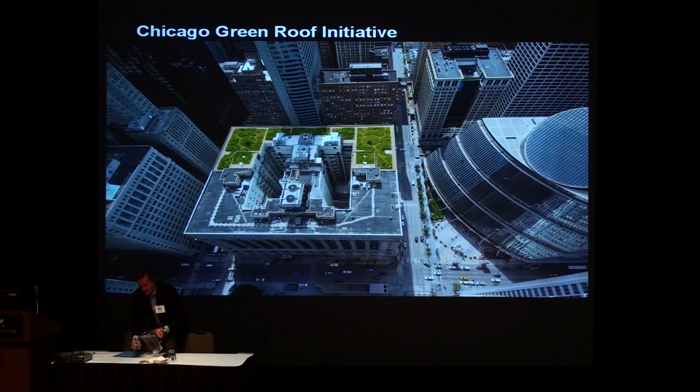Good morning, everyone. I wanted to thank Linda for inviting me here today and Matt for coordinating this. And I look forward to spending time in Germany with Amy. I'm also going to be in Hamburg with my uncle and my aunt, which is going to be interesting. But I always jump at the chance to come to Portland. This is my 5th time, and usually I am here for conferences.

Throughout my career, I've worked on several types of sustainable issues, and I started out in solid waste management or garbage management. And we've always looked towards Portland for all of the innovation in a lot of areas of sustainability, whether it be solid waste or land use planning. Now you're doing wonderful things in solar, which we're going to be following your lead on. And as always in green roofs.

And with Tom Liptan, he's been one of the most innovative and creative leaders globally in the green roof movement for years. And I've always looked very closely at what all of you are doing here. So I'm very excited to be here today and to also share some things that have been happening in Chicago.

This morning I'm going to focus on the tools that we have used to... we've been kind of a leader in green roofs, in the square footage anyway. And then talk about a few of the things that we're going to be doing in the future and some of the planning efforts that are still pushing us to go in this direction. And then in the end, I'm going to briefly talk about an analysis that we just completed to find out actually how many green roofs we have.

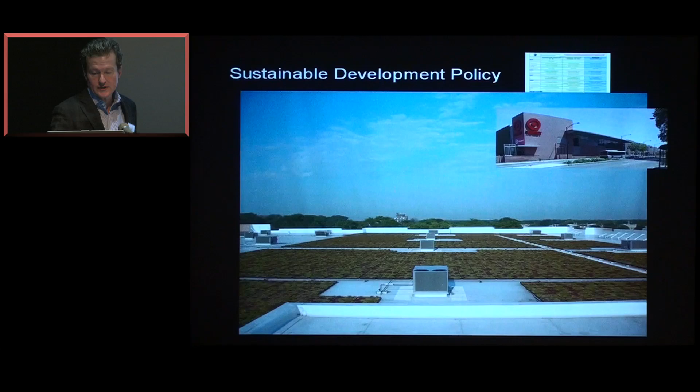And we also worked with them. It was kind of interesting. It's one of their first kind of urban stores where they brought the store up to the street. All the parking is underneath, and the store is actually on the second level. And so there are a lot of fun things that we worked with them on that project.

But how the sustainable development policy works is that any project that receives financial assistance from the city, we use TIF financing, tax increment financing, on a lot of projects. We've spent multiple billions of dollars investing in projects throughout the city through our TIF program. Also, if you're buying land at a reduced price from the city, you're subjected to this policy. We use tax credits a lot for both landmark buildings as well as industrial projects. So any of those projects, we require certain sustainable strategies be followed, and also projects that are coming to us for particular zoning assistance, what we call planned developments.

So projects that exceed a certain size, whether it be height, square footage, number of units, and they're not typically allowed for through the zoning policy, have to come through us through our planned development process. We review the projects, we make recommendations to our plan commission, and then the plan commission makes recommendations to our city council. And a new ordinance actually has to be written to allow a project through this process.

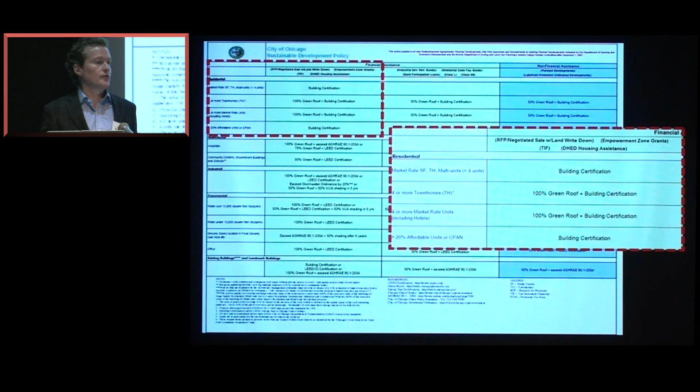And planned developments also include any project along our rivers and in our lakefront protection area. So it really is quite a few projects in the end. It's probably close to around 500 projects a year that are impacted through that planned development process. So any of those, we require a certain amount of sustainability. And it also is categorized by the type of project. So residential projects have different requirements than industrial or commercial projects.

So I think everyone can see it. These are the requirements for residential projects. So you can see, for instance, 4 or more market rate units. So any project that has 4 or more units, if they're receiving TIF assistance, the requirement is that 100% of their roof be vegetated and that they have to achieve some level of building certification.

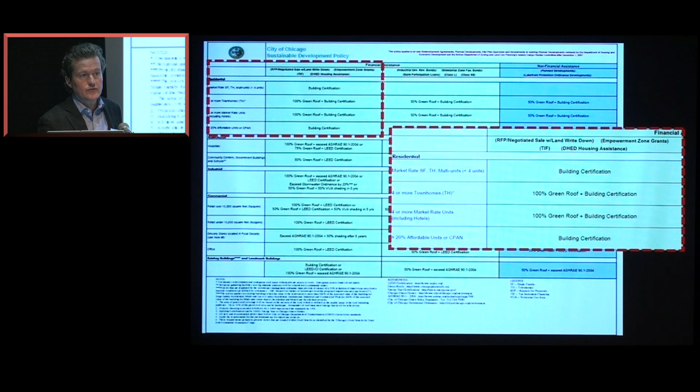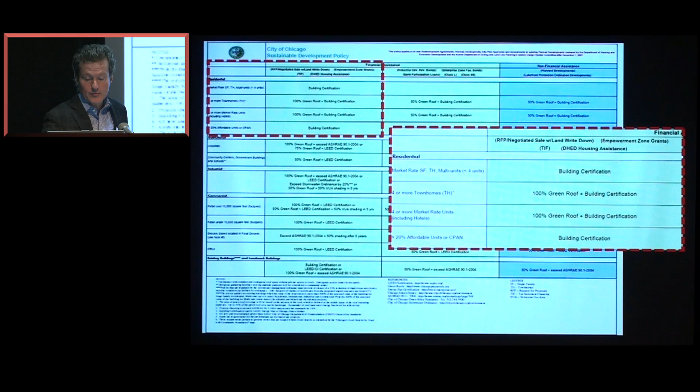And for building certification, they can choose either Energy Star certification or LEED certification. So that's how the policy works. It was first implemented in June of 2004, so it's been a little over 9 years that we've had this in process. And towards the end of my presentation this morning, I'm going to be talking about the

success of this policy. Another stick or another ordinance that we've had since 2008 is our Stormwater Ordinance. It's very simple. It's a performance-based ordinance rather than prescriptive. It requires any project over 15,000 square feet to keep a ½ inch of rain on site, or they have to increase the permeability of the site by 15% from existing conditions.

So very simple ordinance, and we don't tell them how to do it. They just have to provide a stormwater plan during the permitting process that describes and calculates how they're either meeting the increase in permeability or keeping a ½ inch of rain on site.

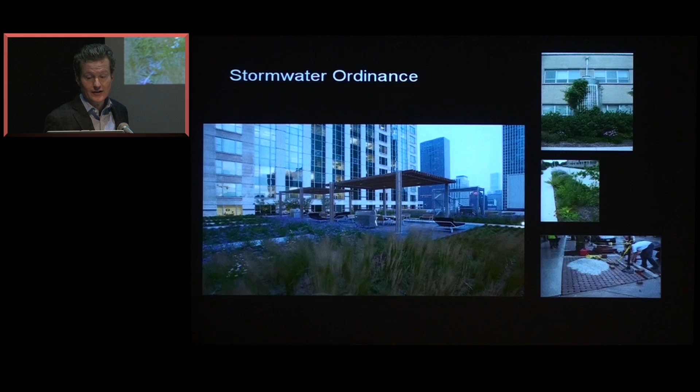So with that, a lot of projects we're seeing cisterns. We're seeing some new parkways that you guys have been using for years that accept bioretention areas within our parkway systems. I actually was walking around downtown last night and took a picture of one near the plaza. I can't believe how many cool projects you guys have out here. So those are the type of strategies that we're seeing being implemented through that ordinance.

And again, that's been in place since 2008, so it's a fairly new ordinance. So those are our two regulations that have been very successful. In terms of incentives, we've had a Green Roof grant program. This was a small grant where we provided $10,000 for residential or small commercial projects. So commercial buildings under 10,000 square feet could qualify.

It was a competitive application process. We had this in place in 2005, 2006, and 2007. During those 3 years, we distributed 75 grants, but unfortunately only half of those projects were constructed. Many of the residents found that the extra structure that they needed just made it economically not feasible.

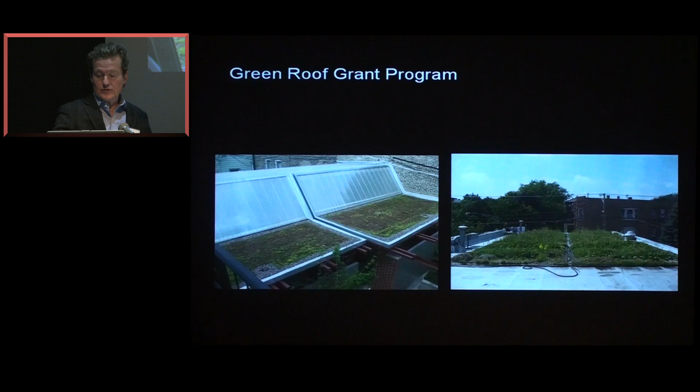So unfortunately, even though we had a lot of applications every year, and it was very difficult to actually review those applications because they're all lovely, only half in the end were completed. We had a Green Roof Improvement Fund, which we affectionately called the GRIF TIF. It was the Central Loop TIF district, so the downtown area of the city of Chicago.

We were providing a 50% match for any existing building that would place a green roof on their building, up to $100,000 per project. I thought that was a pretty substantial incentive. In the 3 years that it was in place, because the TIF expired in 2008, we only had one application. And I went to every group that I could possibly find to talk to.

BOMA, Building Owners and Managers Association, 90% of the buildings in downtown Chicago are members of BOMA. I went to speak at all their luncheons. Real estate associations. We have a lot of very active associations, and I stumped this everywhere. And in the end, we only had one application.

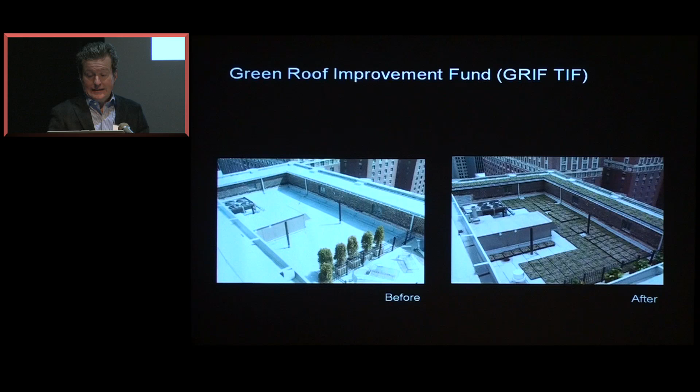It was a condominium in the downtown. I believe it was about 20,000 square feet. So again, not one of the most successful programs ever. And we did not replicate it in any of the other TIF districts just because it wasn't very successful.

We also have a density bonus, which I believe Portland's had for quite a while. It's a very complicated calculation. It's not for every square foot of green roof you get an extra square foot of building. It is complicated, but since I believe this has been in place since 2007, we've probably had between a dozen to 20 projects take advantage of this density bonus.

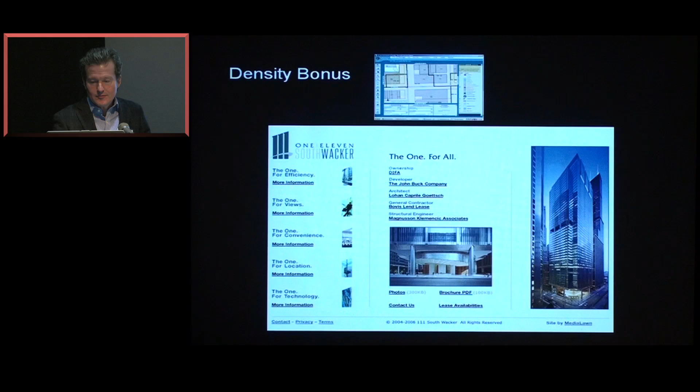And I'm sorry I don't have better data, but we have not done a very good job of tracking how many projects have gone for this density bonus. The photo of this building, that is 111 South Wacker, which is one of my favorite buildings in downtown Chicago. It's LEED Gold. It recently sold, and it was the highest price per square foot of Class A office building, and I think it's because of the LEED certification. A German company actually bought that building.

Another incentive is our Small Business Improvement Fund. This is a map of the city of Chicago, and all of the areas that are crosshatched in purple are small business improvement districts. If you're a business in one of those districts, you can receive a grant for certain strategies, and green roofs do apply to that. It's a sliding scale, so depending on how small your business is, how many employees you have, and how profitable you are, it depends on how much assistance you can get.

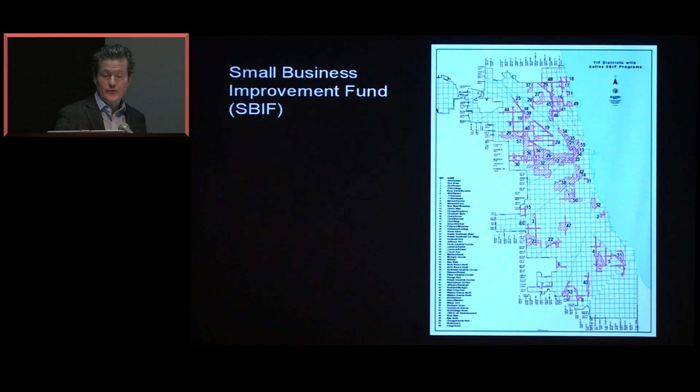It's anywhere from 25% to 75% of the cost of a green roof. So it's been a really successful program as well. We also have an open space impact fee credit.

Any project in Chicago that includes new residential units, they have to either provide new open space or they have to pay into this open space credit fee. But if you place a green roof on your project that is open to all of the residents of that building or the general public, you receive a credit on that open space impact fee,

and it can be very substantial. And I'm going to show a project later in the presentation that took advantage of this, and you can see how substantial that program is. This is about 4 years old, and it has been pretty successful.

We also have the green permitting program, which I believe Portland's had in place. Linda, you've had it for quite a while as well, right? Yeah, and again, it's very simple. If your building qualifies as a green building under this process,

instead of the typical 60 to 90 days that you can spend in our permitting office, we promise that your project will be reviewed and approved in 30 days or less. And we've tried to keep that. It's not just the city, it's also the applicant that has to provide the information at the right time. But it has been very successful in promoting LEED certification as well as green roofs.

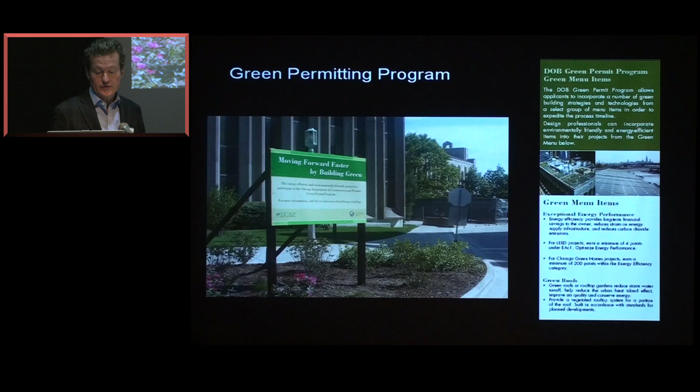Because part of the qualification process is that you not only have to be LEED certified, but you also have to choose from a list of menu items. And a green roof is one of the menu items that you can choose from. And if it is a project that is required to have a green roof through the Sustainable Development Policy, they have to increase the square footage or the percentage of the roof that is covered in order to qualify for this incentive. So we've worked very closely with the building department to make sure.

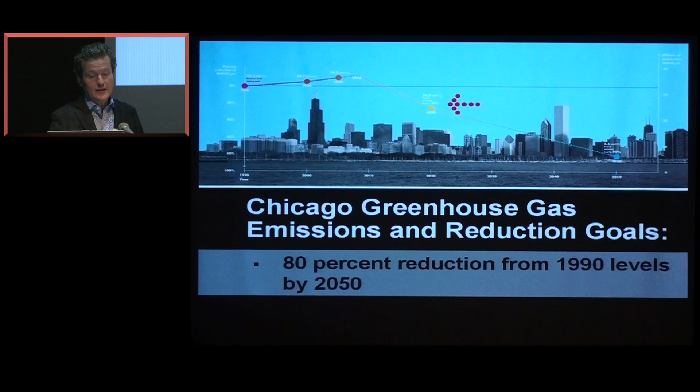And in terms of planning that we've completed that will further encourage green roofs, one is our climate action plan. We have aggressive goals. We have 25% reduction in our greenhouse gases from 1990 levels by 2020, and 80% reduction by 2050.

What's interesting in Chicago, which might be a little different from Portland, is that in the research that we conducted preparing for this plan, we found that 70% of our greenhouse gas emissions come from electricity used in buildings. That's a little higher than our suburban counterparts. A lot more of their footprint comes from transportation. But 70% comes from energy used in buildings.

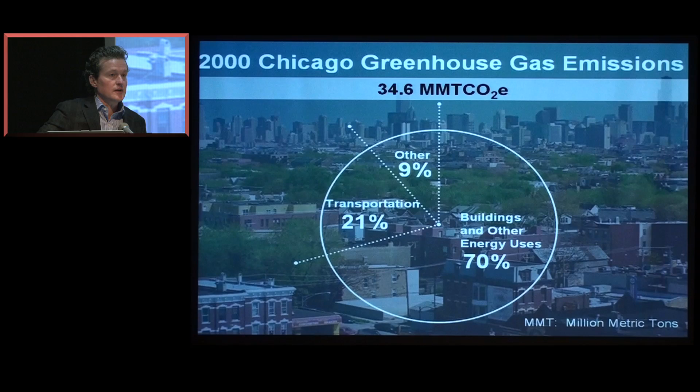And another interesting fact for Chicago is that 80% of the buildings that will be standing during our reduction goal period are already built. So that is really telling us that we need to focus on retrofitting the existing building stock in Chicago. So again, green roofs can be a very effective tool in that.

And another interesting thing, which sounds very similar to Portland's, is we have adaptation. A lot of the goals and actions associated with our climate action plan are how we're going to adapt to climate change that is already going to occur due to the carbon that's already in the atmosphere.

So green roofs play a very active role because in Chicago, we're going to see more frequent and heavier rainfall events, and it's going to be during periods of the year that we don't want to see rainfall. So we feel that green roofs and their ability to absorb stormwater are a really important tool in preparing for climate change that we will see despite what happens globally.

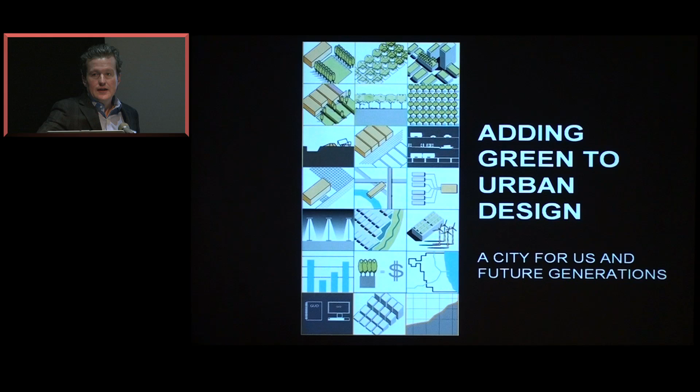Another was a multi-year, multi-agency and departmental process we called Adding Green to Urban Design. Our goal was to look at ways to optimize the environmental benefits of our urban design in Chicago. And we looked at everything outside the building. We felt LEED pretty much covered everything that's going on inside the building.

But at that point, especially, this was 5 years ago, they weren't really looking at a lot of the exterior. So we looked at the rooftops, the facades of buildings, all the way to the center of the street. So how can we build better streets and better sidewalks, et cetera.

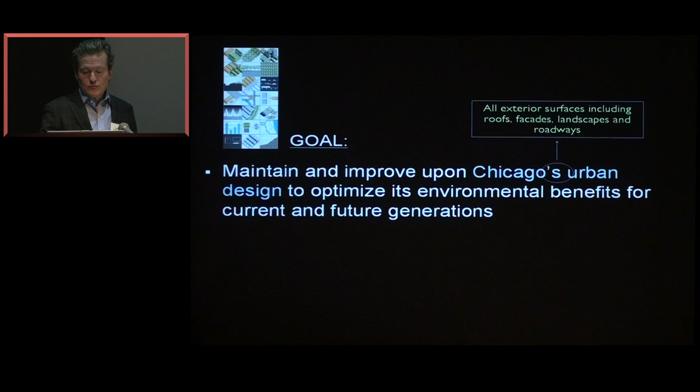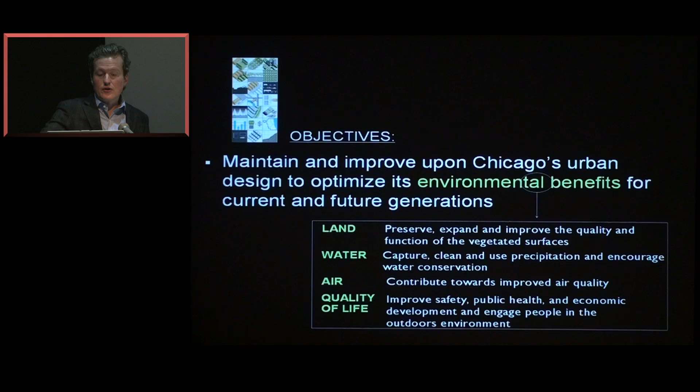And the objectives were to preserve, expand, and improve the quality and function of our vegetated surfaces in that realm of the city, capture, clean, and reuse as much rainwater as possible in the city, anything that contributes to better air quality and improving quality of life.

And some of the key strategies that came out of that process were that we did increase the green roof requirements in our policy. We were at that point requiring 50%, 25%, 10% of the roof be covered in vegetation. Back in 2008, we increased that. So you saw earlier that now we're requiring 100% of the roof, 50%. I think 50% is the smallest amount that we do require in terms of covering your roof with vegetation.

We also had all of our departments that have landscaping plans or build landscapes create a sustainable landscape standard for all of their projects. We created an urban forest agenda for the first time with the city. And we've had a landscape ordinance in place since, I believe, the 1980s. But we wanted to have more context-based regulations and look especially at more performance-based ones. So we were looking at Seattle in particular, the Seattle Green Factor.

And what's interesting is that we've spent the last couple of years looking at projects, and between the Sustainable Development Policy and our new Stormwater Ordinance, you combine those, we actually exceed the scores that are required by the Seattle Green Factor. So we haven't really gone further in terms of implementing a more performance-based landscape ordinance, and I'm sorry, I should have thrown in the landscape ordinance too. So the landscape ordinance, the Sustainable Development Policy, and the Stormwater Ordinance, all three of those being applied, our projects are scoring very high. So we have decided not to go any further with those.

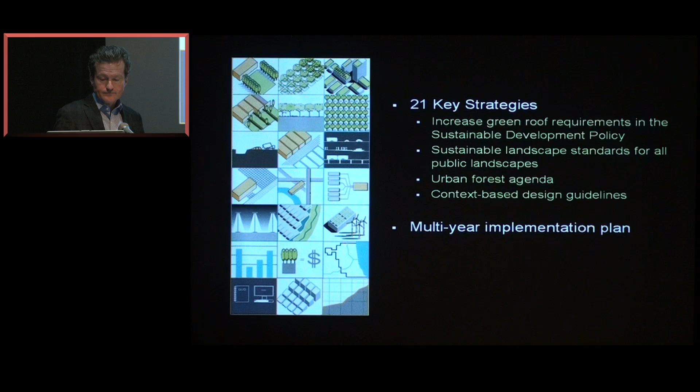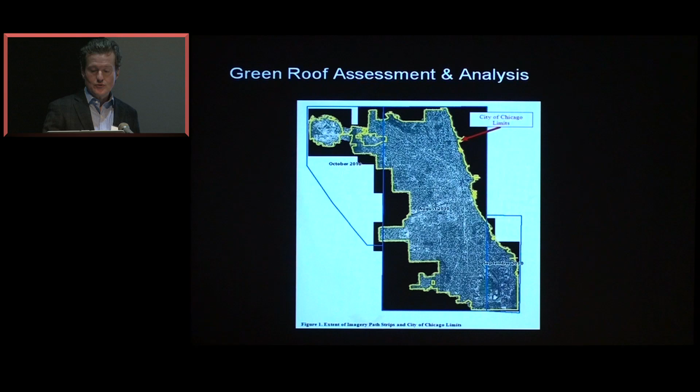So that's been happening for about the last 10 years in Chicago, and we wanted to see how effective they were. So we bought satellite imagery from the fall of 2010. It was multi-spectral 8-band technology. It was really cool satellite data. And what's neat about the 8-band is previously there were 4-band, meaning the number of colors on the color spectrum that they were using. We were only the second city to use the 8-band technology, and why we wanted to use that is because we also wanted to look at the health of the green roofs that were constructed. So we wanted to know how many green roofs there were, what the square footage is, and the relative health of those green roofs. So we thought we had the grooviest data available at that point.

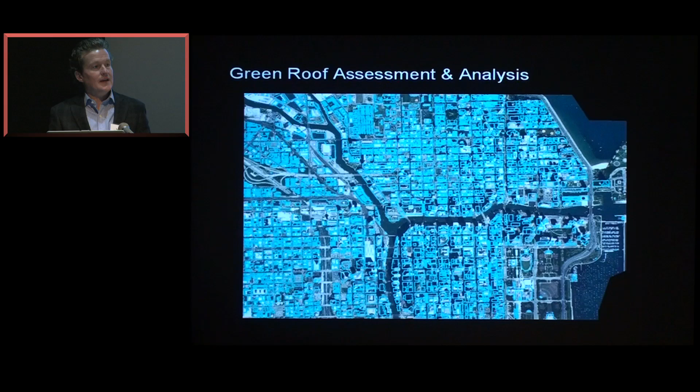So what we got is this satellite imagery of all of the vegetation in the city. So the first thing that we had to do was apply our building footprint data layer so we could actually identify the vegetation in the city that is on the rooftops, not in our parkways or not a street tree, et cetera. So they applied this building layer, and then they did all of this really cool manipulation. They used all these cool formulas that scanned the entire city that helped identify vegetation that could be on a rooftop, and then they had to do a lot of manual manipulation in the end. So I feel really comfortable that this data is pretty accurate. And in the end, it identified green roofs.

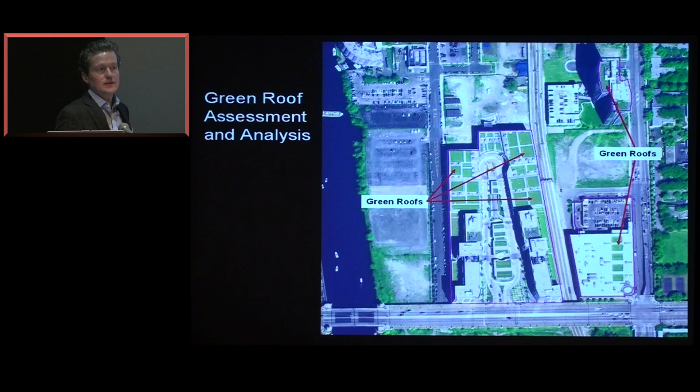And this is kind of a fun slide because it shows how our green roof policy kind of evolved. This is the Target store on Roosevelt. And you can see that the requirement was only 25% of the roof, and that's exactly what they did. They didn't do a square foot over 25%. And this is a condominium where they did 50% of the roof, and the rest of that is mechanicals because it's 50% of the net roof area. So they can subtract out any areas that were used for swimming pools or

mechanicals, etc. And then this is a large multi-use project, and you can see that the green roof requirement was 50%, and that's exactly what they did. And this is actually a plaza, which is over an underground parking garage, so they can include that in their square footage too.

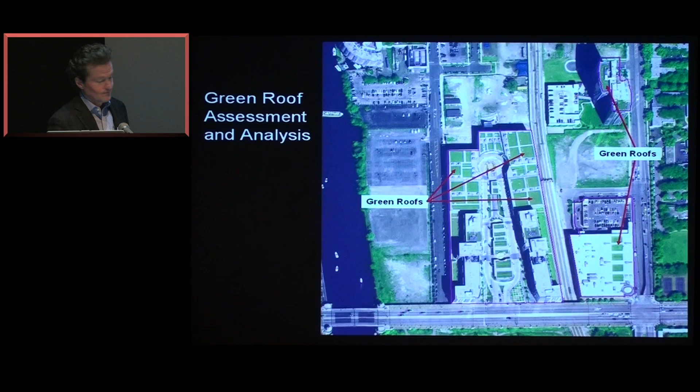So in the end, what we found, and this is as of August of 2010, we have 359 green roofs. They totaled almost 5.5 million square feet. The average size was 15,000 square feet, and the median was 5,000. So Portland has more green roofs, but you can see that some of these projects are a little larger. And this total does include, I have to fess up, Millennium Park.

I hope all of you, if you haven't come to Chicago, please do. It's a beautiful new park in the downtown area. It was a former huge parking lot and commuter rail station. We built a couple more layers of parking and then placed a park on top of it. It's about 25 acres, absolutely stunning.

And because it is over a parking structure, we did include it in our green roof totals. There might be some debate on whether that really is a green roof, but we want to be number one, so we used it.

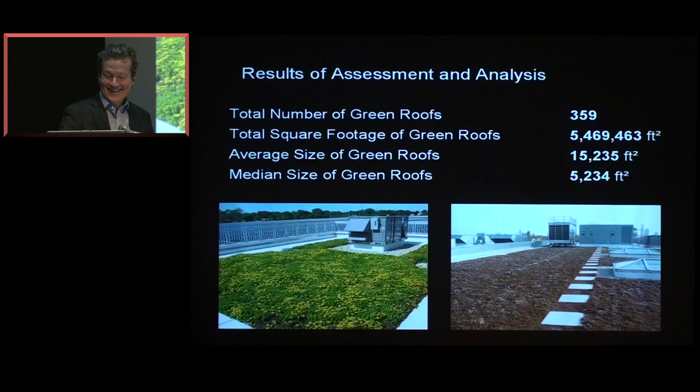This is really interesting, because we also wanted to find out where these green roofs came from. Were they mostly voluntary, or because of the sustainable development policy? What we found is that 82% of the roofs built in Chicago were due to the sustainable development policy. In terms of elected versus required, 297 were required, 62 were elective. We feel that 3 of them were solely due to the Stormwater Ordinance.

Some of the projects required to have green roofs by the Sustainable Development Policy ended up having larger green roofs because of the Stormwater Ordinance, since there's a major credit associated with green roofs when creating your stormwater management plan. We feel that 17 were due to the green permitting program, and 62 were totally elective.

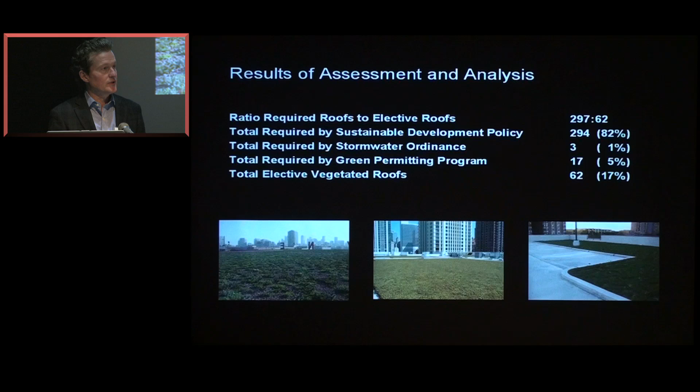Oh, that is really good. We didn't look at that. That's only based on the number. So thank you, we'll look at that, because we can do that very easily. Good.

I wish I could give some really great data on this relative health. What it showed is that most of the green roofs are healthy, but I'm not real comfortable giving hard and fast conclusions on the health, because we need to do a little more research into this. We called it the NDVI, the Normalized Difference Vegetation Index. Really complicated. Hopefully in a year or two I can give better data on that. But at first blush, they are pretty healthy.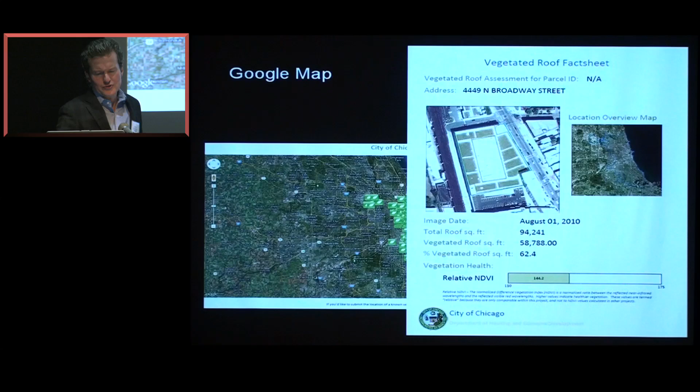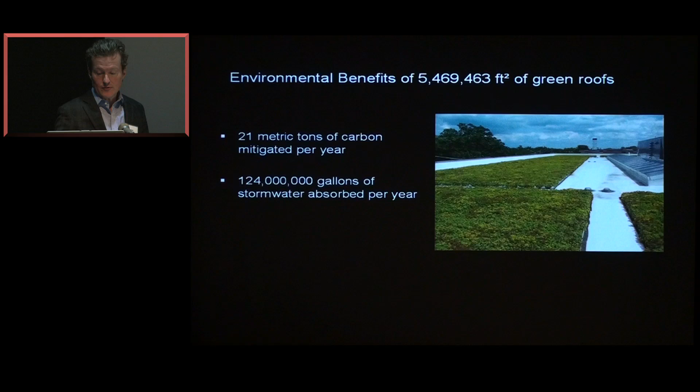In terms of the environmental benefits of the square footage and number, we have estimated that 21 metric tons of carbon are mitigated each year, and over 124 million gallons of stormwater are absorbed per year. So that's been kind of our track or our history.

And now do I have time to go through a couple of projects? Five minutes? Okay, I'll go through these really quickly.

This is one of my favorite stories. Okay, so 900 North Michigan. This is Michigan Avenue, the Magnificent Mile. You've got Lake Michigan over here. This is the John Hancock building. This is 900 North Michigan. It's been a high-rise residential and office building, one of the prime pieces of real estate in Chicago.

They added some residential units, taking away from some of their office space, so they were required to either build new open space or pay into that open space impact fee. They chose to build a green roof and get the credit. So they first vegetated that part of their roof. These are photos. This is actually an award-winning roof.

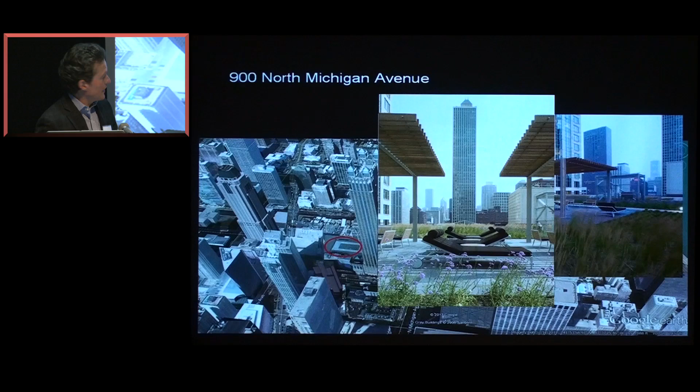And they opened it up to their residents, both the residents as well as the commercial tenants. They received so much positive feedback—this building is completely surrounded by high-rises—that the building and managers decided to also vegetate the roof of their parking garage directly behind the building.

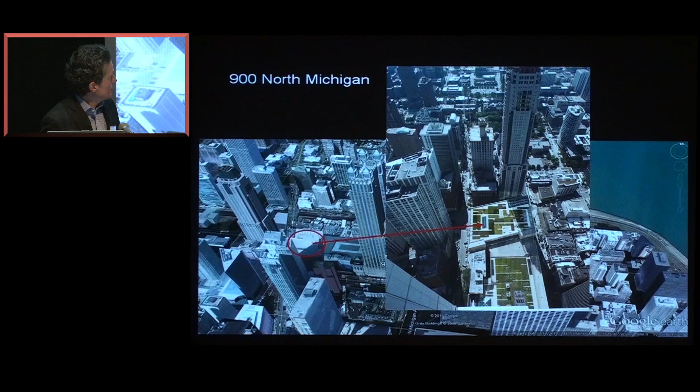There you can see the image. This is the original green roof, and this is the parking garage that was vegetated after they saw the impact. Sorry, I forgot I did that.

This took place probably 6 or 7 years ago. The managers found that the tenants in the commercial area whose units overlooked the green roof were being leased faster, and the leases were lasting longer, than the businesses overlooking Lake Michigan and Michigan Avenue. It's amazing that tenants would want space there instead of looking at the lake, because there's an opening behind the John Hancock so they do have direct views of the lake.

So they ended up vegetating this part of the roof too, just about 2 summers ago, and those are images of that building. I just love that story, because they did it to get an incentive from the city, but then because of the feedback they got, they did even more, and found out economically they could make more money if they vegetated more of the roofs. So right now, almost 100% of the rooftops are vegetated.

The next one is the Schwab Rehabilitation Center. This is on the southwest side of Chicago, a really kind of dodgy neighborhood—a rehabilitation center for young kids. I went to the opening of this green roof.

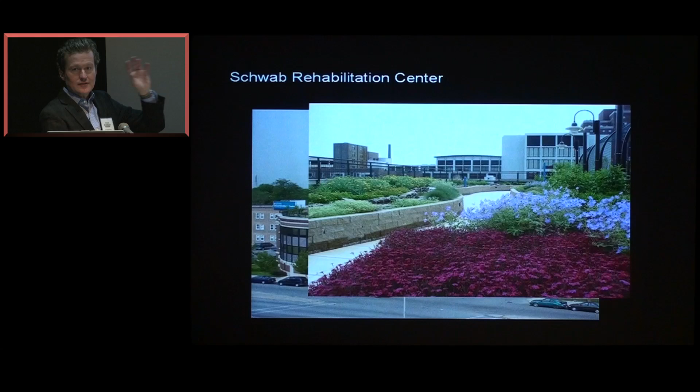It's a really cool green roof with all these pathways. It has a misting station to mimic rain, and a basketball court, so the kids can go out and play. It's a lovely project with a great impact on the kids staying there.

This is my favorite project in Chicago: the Comer Youth Center. Again, it's in a really dangerous neighborhood on the south side of Chicago. It's a youth center with all kinds of after-school, weekend, and summer programs. They also have a really successful drill academy that performs all over the United States. This roof is in a beautiful building designed by John Ronan.

He's one of our starchitects in Chicago. The green roof is right in the middle of that building. Initially it's a very thick roof, I think varying anywhere from 12 to 18 inches. They started out with almost all prairie plants.

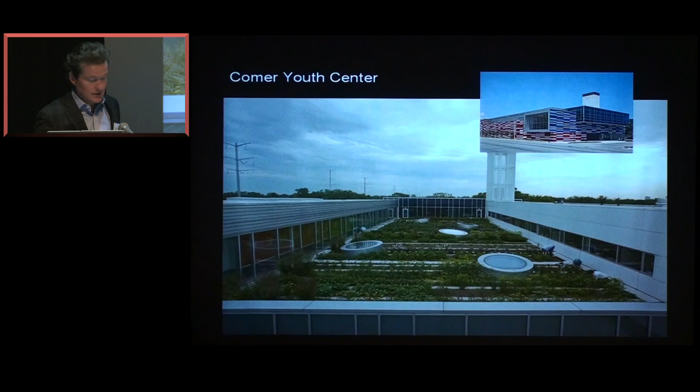They decided they wanted to base more curricula around the green roof, so they changed the palette of their plantings, and now 75% of the roof is food production. They've built curricula around the green roof, and the students go up and do all kinds of activities based on what's growing, and they also help cultivate—planting strawberries and all kinds of lettuce.

They actually have a cafeteria downstairs, and they use everything they grow in their cafeteria. So it's a really, really cool story. With that, thank you very much, and again, I'm so happy to be here.